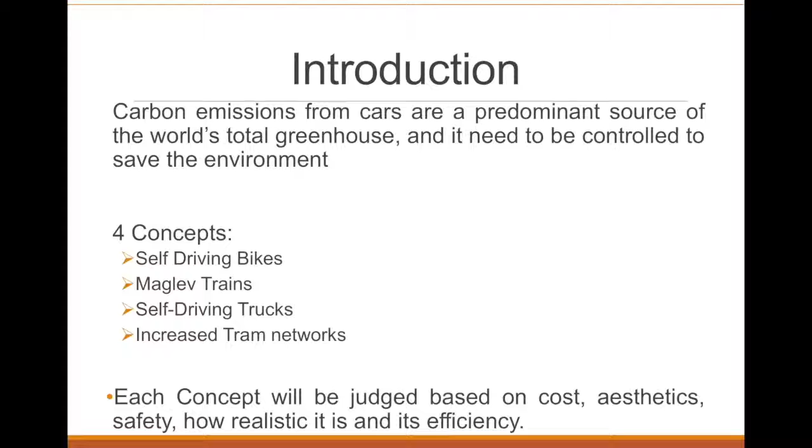Cost is very important for any design, as it is an increasingly important driver for clients expecting maximum return on good design. Innovativeness is important as we are talking about the future, and it needs to be assessed how new the concept will be, as this will draw more attention and hype, which can create large income. Safety is arguably the most important criteria, as causing harm to the user can have huge legal implications and cost the company lots of money.

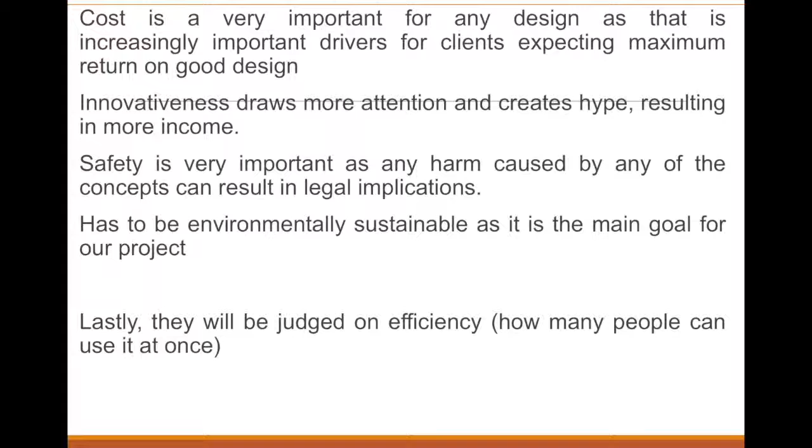As this project is about how we must be environmentally sustainable in the future, it is important to analyze how sustainable each of the concepts are. Therefore, we have incorporated it as one of the criteria we are judging these concepts on. Lastly, efficiency - this essentially means how many people can use the means of transportation at one time.

Our intent is to make cities inclusive, safe, resilient, and sustainable, which targets UN Sustainability Goal 11 of sustainable cities and communities. The concept of a self-driving bike aligns with multiple goals from this part of the UN sustainability goals, such as safe, affordable, accessible, and sustainable transport systems.

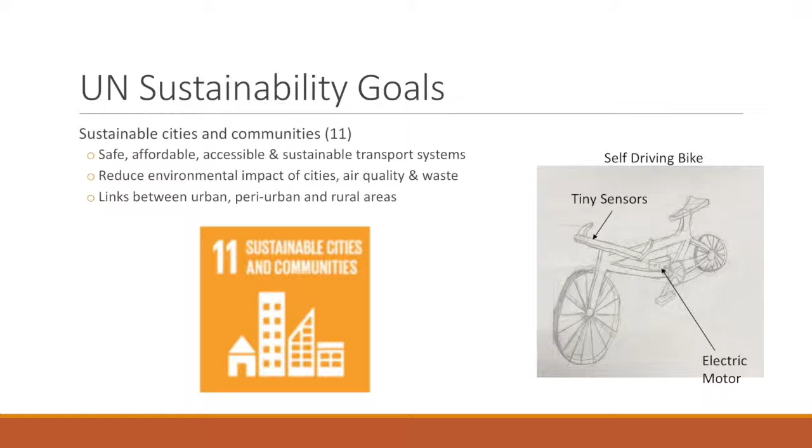With the bikes being electric, they won't release harmful gases into the atmosphere. They would run off the same system that most Queensland uses with the go-cards, so the trips will be affordable, accessible, and also their manufacturing process is cheaper than most other types of transport.

After deciding on the concept of self-driving bikes, material choices had to be made to design a proper concept. 4130 steel alloy was decided to be the best material for the bicycle frame, due to its high elastic modulus of 190 to 210 GPa. This means it has higher stiffness as well as high fatigue failure resistance, making the material good under tensile forces.

To find the approximate cost of the concept, we looked at the average weight of steel-framed bikes and the price of 4130 steel alloy. Steel-framed bikes weigh approximately 12.133596 kilograms, without tyres, seat, and gear system. The price of 4130 steel alloy is $15.89 per 1.211092 kilograms. Therefore, it costs on average $159.20 per bicycle frame, and with an average pair of wheels costing about $100 for a high-quality steel compound wheel set, this costs about $260 per bicycle.

With the technology not being available yet, we cannot calculate its exact cost, but it is assumed it will be relatively expensive, with Tesla prices already far more expensive than most other automobiles due to self-driving technology and long-lasting electric battery life. So we can safely assume it will cost upwards of $300 per bicycle, plus the cost of constructing charging bays, making the overall cost quite expensive after initial construction.

The system should sustain itself with a go-card-like idea where people pay to use the mode of transport, which will in turn fund power consumption, wages and repairs for the self-driving bikes, therefore giving this a 2 in cost.

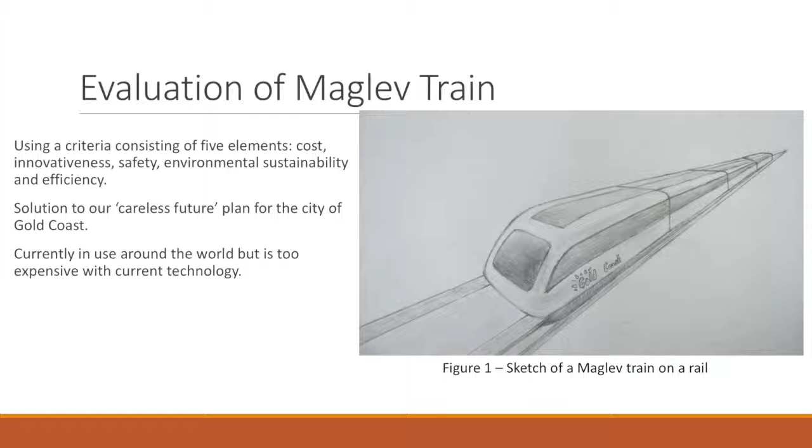Maglev train technology currently is too expensive to practically be used with current technology, which is its major drawback. However, with technology advancing by 2050, we believe a new form of ceramic or new method of cooling could be applied, drastically decreasing costs. The maglev train is a very quiet form of transportation compared to other forms of trains.

Its current design makes it appear as aesthetic as possible whilst limiting noise pollution, including combating sonic booms through tunnels, making it a good option for transport through populated areas. It does, however, require its own rails, which must be specifically crafted to support magnetic levitation of the train.

The maglev train is a very safe form of transport as a result of its design and safety measures. However, there have been fatal crashes involving the maglev train in the last 10 years, so there is still further to go to make the train safer for the public.

The maglev train helps support UN Sustainability Goal 11, which refers to sustainable cities and communities. It does this by providing efficient, safe, and potentially affordable transport for communities. Renewable energy is able to be used to cool the superconductors once it's efficient, creating a sustainable method of transportation. This provides the everyday person with sustainable transport, which is part of Goal 11, which is our main reason for selecting the maglev train as one of our solutions.

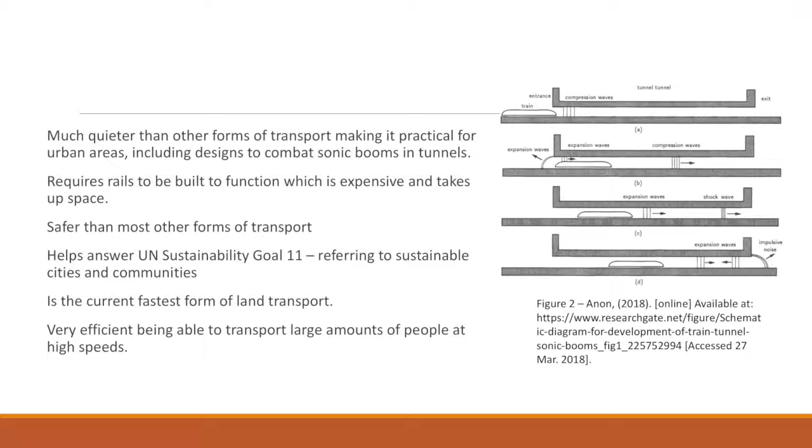Efficiency is a big positive for the maglev train. It is able to carry large amounts of people over long distances at very high speeds, making it a very practical form of long-distance transport.

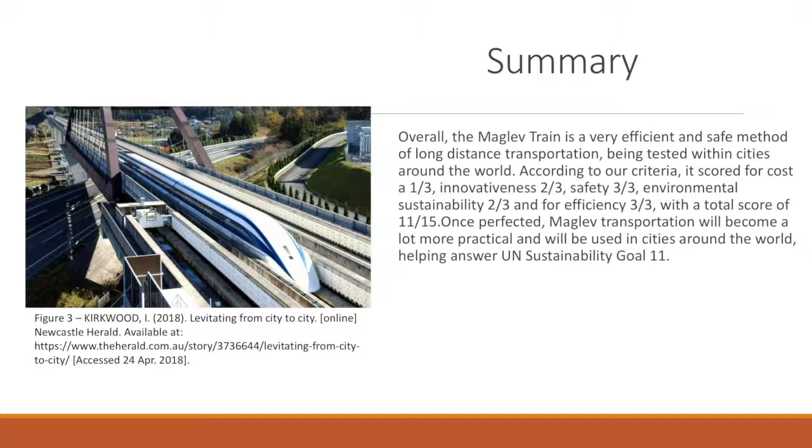Overall, the maglev train is a very efficient and safe method of long-distance transportation, which is already being tested within cities around the world. For cost, it scores a 1 out of 3, innovativeness 2 out of 3, safety 3 out of 3, environmental sustainability 2 out of 3, and for efficiency 3 out of 3, with a total score of 11 out of 15.

The three-wheeled bike was designed to meet the requirements of many users and attract a wider variety of customers such as elderly people, intoxicated people, and families with children, providing a safe method of transportation, and aligning with UN Sustainable Development Goal 11 by making the bike affordable, accessible, safe, and environmentally friendly.

All of this was achieved by using common materials and technology which does not require a highly trained person to assemble, significantly reducing the production cost.

It's accessible, as the bike can be easily accessed through an app which will send a message to the bike, making it come to you autonomously. The bike is also safe since it's fitted with self-driving technology, meaning it is able to predict accidents before they happen and avoid them. Finally, it's environmentally friendly since the bike is powered by an electric engine which can be easily recharged back at the station without resulting in the release of any toxic gases.

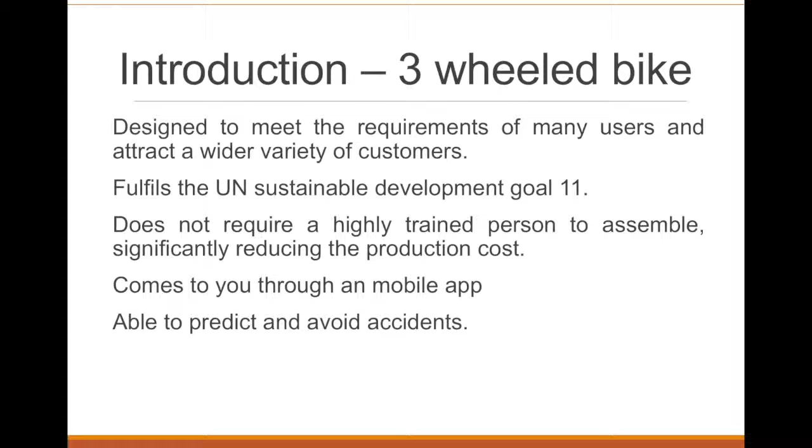The bike is not tied to one specific target market. Instead, it includes a wider range of demographics and ages, thanks to its ease of use. That allows disabled people and intoxicated people to use it, as well as the multiple seats in the back with lots of space being optimal for families with children and people wanting to travel in groups.

Cost-wise, the bike has a large frame made of aluminium and an engine to power the bike in case the user is not able to pedal, and self-driving technology, coming to the conclusion that the estimated total cost for the bike is $500 to $700 per bike.

The design concept has a sleek design which is both aerodynamic and also very aesthetically pleasing, increasing the possibility of it becoming a tourist attraction in the future, further expanding its target market.

As mentioned before, the bike is fitted with self-driving technology, meaning it can predict an accident before it happens and avoid it, making it very safe for anyone to use.

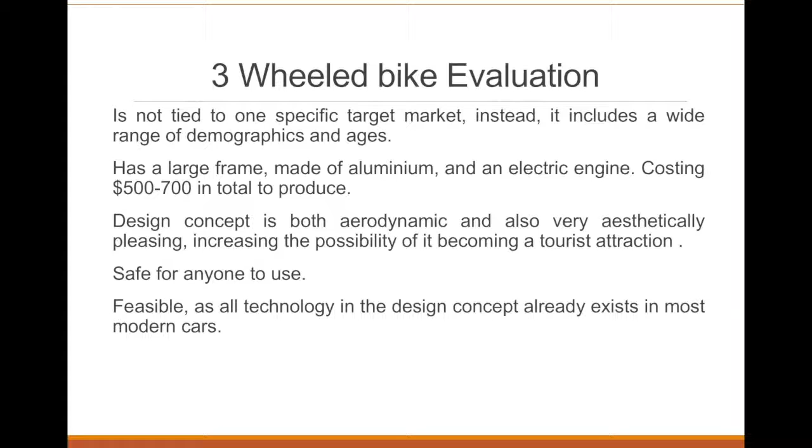Finally, in terms of the design concept feasibility, self-driving and safety technology in the bike already exists in most modern cars nowadays, and developing the frame of the bike will be the same as developing the frame of any current vehicle, as aluminium is one of the easiest materials to work with next to steel.

In conclusion, if we were to give each aspect a score from 1 to 3, with 1 being very bad, 2 being average, and 3 very good: cost gets a score of 2 for costing more than other concepts to produce, innovativeness gets a score of 2 for the technology present in the bike, and safety gets a score of 3 for having autonomous driving and the ability to avoid crashes.

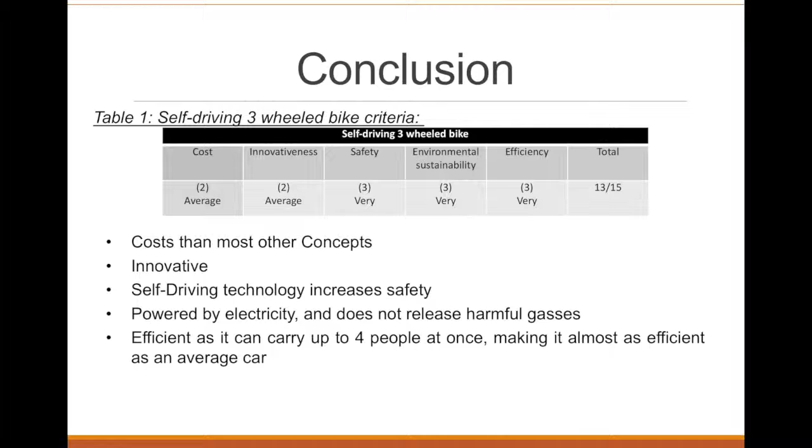Environmental sustainability gets a score of 3 for having an electric engine which does not release any harmful gases and operates on renewable energy. Finally, efficiency gets a score of 3 for having enough seats to fit 4 people at once, almost as good as cars, giving a total score of 13 out of 15 points.

As previously stated, our concept is focused on targeting UN Sustainable Goal 11, which includes developing cities that are inclusive, safe, resilient, and sustainable. To meet this goal, we had to create links between urban and rural areas. To do this, we decided to combine our self-driving bikes with a self-driving delivery truck system.

The first section in the evaluation criteria is cost. To get an idea of the cost, we would need to evaluate the price of materials used in regular trucks today compared to the chosen material for our concept, carbon fibre. The most used material when manufacturing a truck is usually steel or a steel alloy, which usually ranges between $1 to $10 per kilogram, compared to carbon fibre, which can be upwards of $100 per kilogram.

However, by 2050, manufacturing processes and new technologies will most likely decrease the cost of carbon fibre immensely. Nonetheless, it is still far more expensive than materials used in present society. In addition, as the technology is not readily available yet, we cannot accurately calculate how expensive the self-driving technology is, although Tesla, a company that manufactures self-driving cars, sells them much more expensive than regular cars, so it can be assumed the technology needed for the trucks will also be extremely expensive.

Finally, the construction of charging points will also be an additional cost for this concept. By evaluating the cost of steel compared to carbon fibre, combined with the cost of self-driving technologies and the construction of charging points, it can be concluded that the self-driving delivery trucks would be very costly, and are therefore given a 1 for the cost criteria.

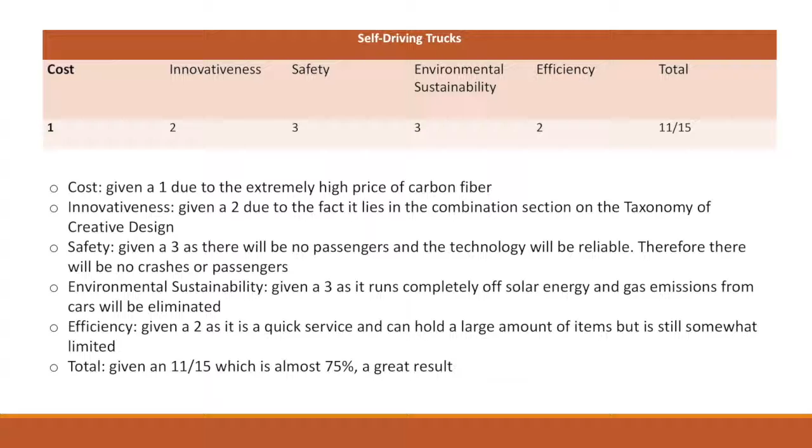Overall, the self-driving truck system received a total of 11 out of 15 for our criteria, which is a great result. To improve on the concept, a cheaper production method for carbon fibre will need to be created. Nonetheless, the self-driving truck will be a great system to incorporate with our self-driving bikes to create a carless future.

To conclude, we have been given the goal of creating a carless city by 2050. Our proposed concept is the use of self-driving bikes combined with existing services such as trams and trains, and also a new self-driving delivery truck system. To analyse each of our aspects, we used a criteria system which included cost, innovativeness, safety, environmental sustainability, and efficiency.

For each section, the concepts were ranked 1 to 3, 3 being the best and 1 being the worst, then given a total score out of 15. With total scores of 9 out of 15 for self-driving bikes, 13 out of 15 for three-wheeled bikes, 11 out of 15 for the maglev train, and 11 out of 15 for the self-driving truck system, our entire concept received a total score of 44 out of 60. With a score of almost 75%, it can be concluded that the proposed idea would be a great solution for a carless future in 2050.